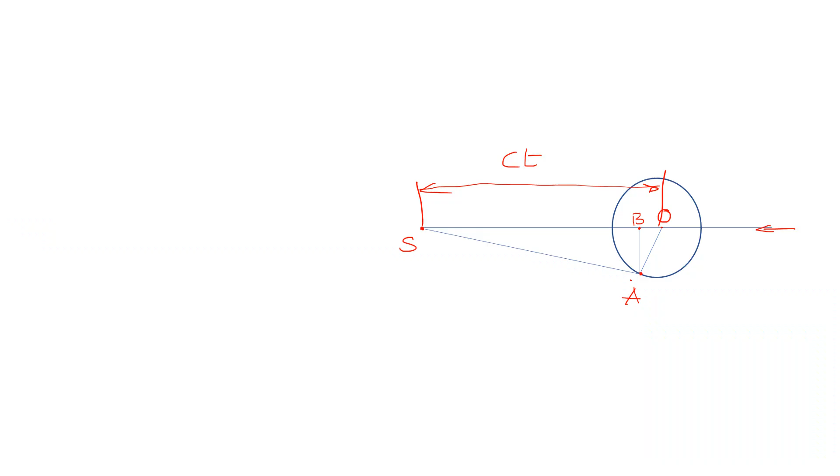In this video lecture, I will explain a problem on Mach cone. An aircraft is flying at an altitude of 3000 meters with 2000 km per hour. It passes directly over the head of the observer. Find the time taken by the observer to hear the supersonic boom after passing over the head of the observer.

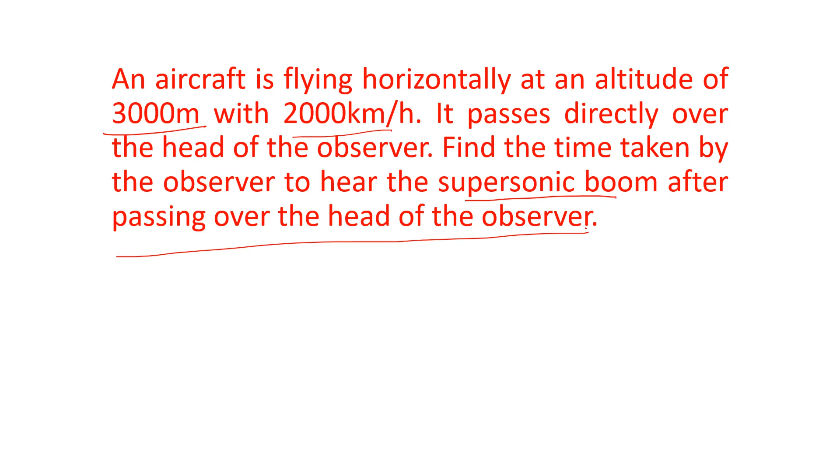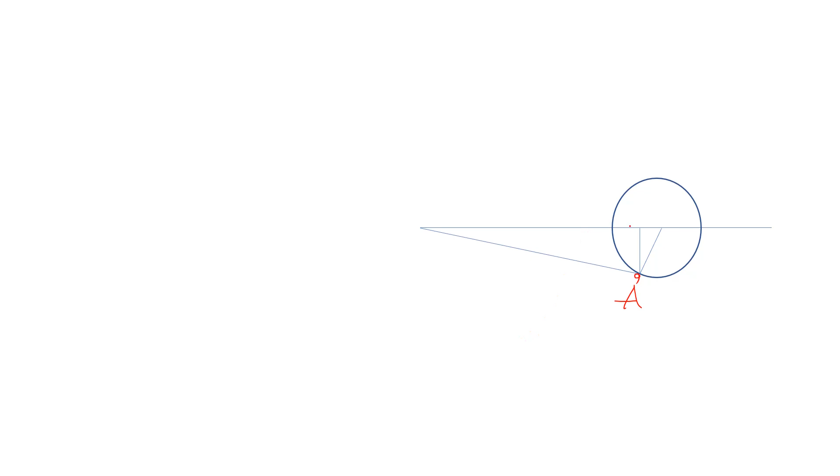Let A be the observer. B is a point directly over the head of the observer. This is the path of the flight. The flight is moving horizontally. Let the current position of the flight be S.

Our question is, after what time can the observer feel the sound wave after passing the point B? B is a point which is directly over the head of the observer. After crossing the point B, how much time will it take to hear the supersonic boom? That is the question.

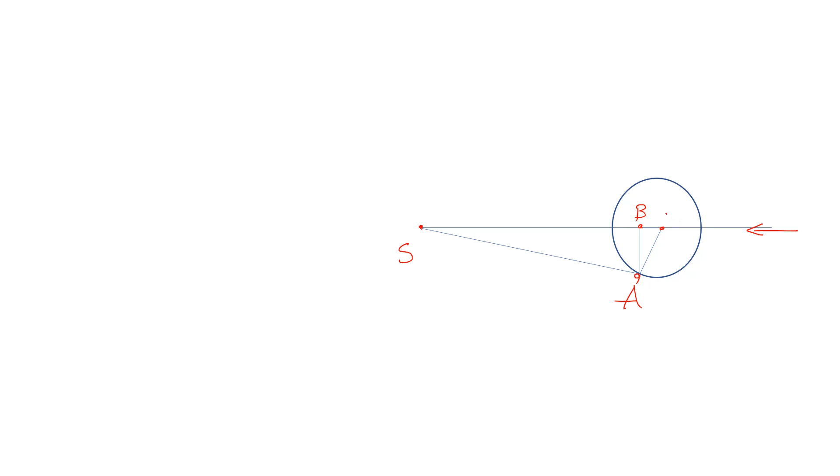The flight is moving horizontally. At time t equal to 0, let O be the position of the flight. With t seconds, the flight travels a distance of c into t, where c is the flight velocity.

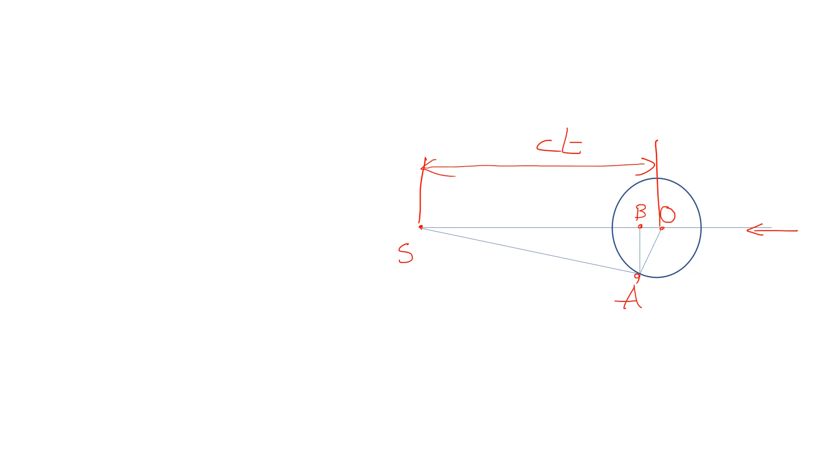The observer at point A can feel the sound wave produced by the flight when it was at point O. In other words, the sound wave produced by the flight when it was at point O will reach the observer in time t seconds. That is, AO equal to a into t. With time t seconds, the distance traveled by the flight equals c into t.

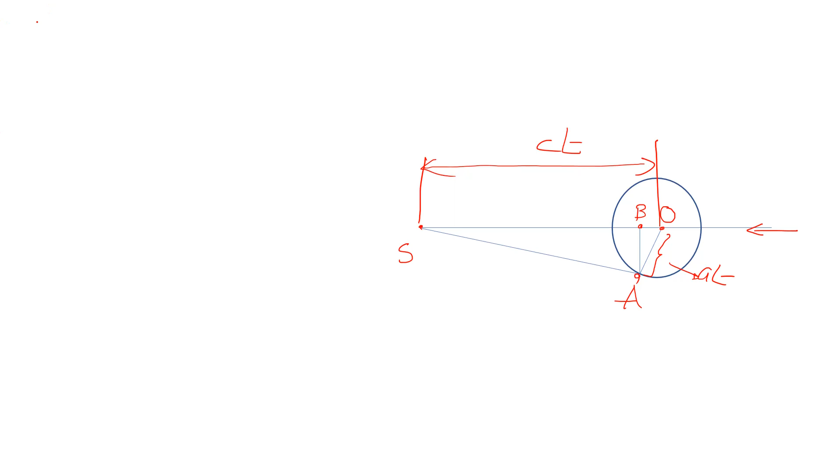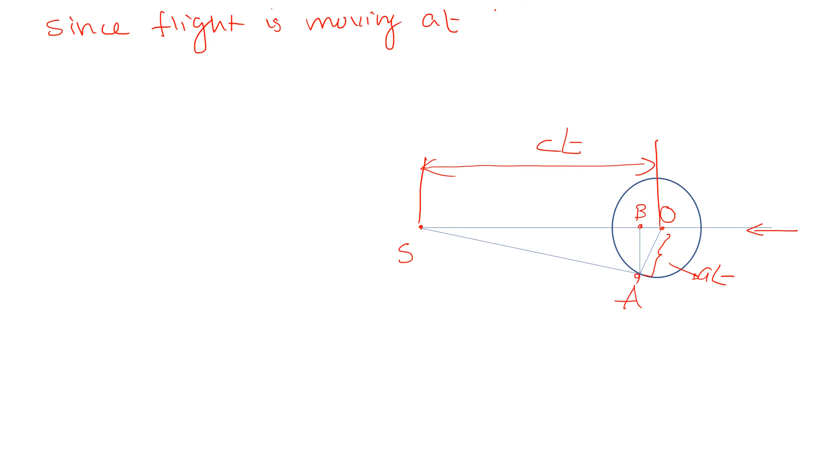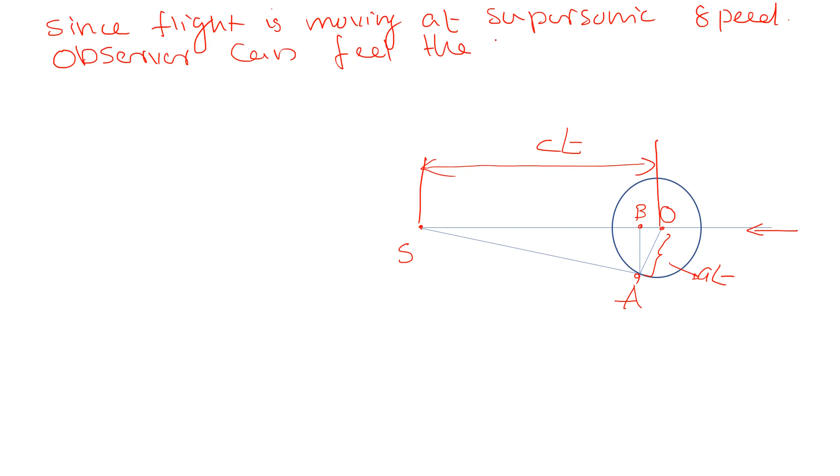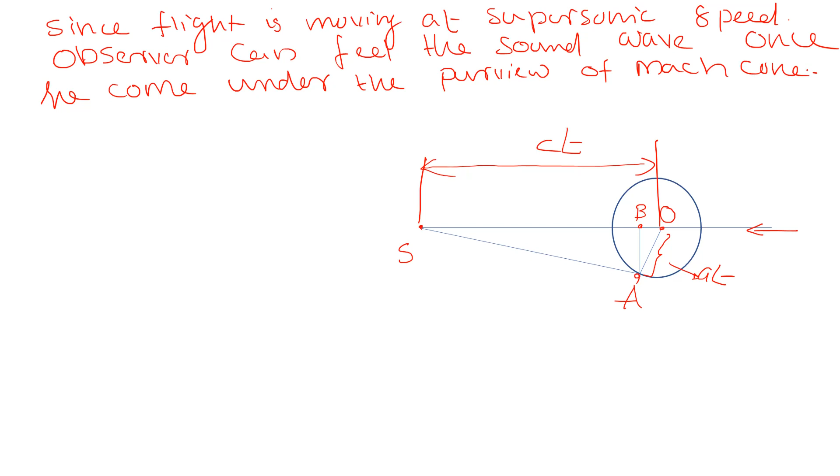In other words, since the flight is moving at supersonic speed, the observer can feel the sound wave once he comes under the purview of the Mach cone. Here the Mach cone is clear: SAO. The Mach angle is this angle, alpha.

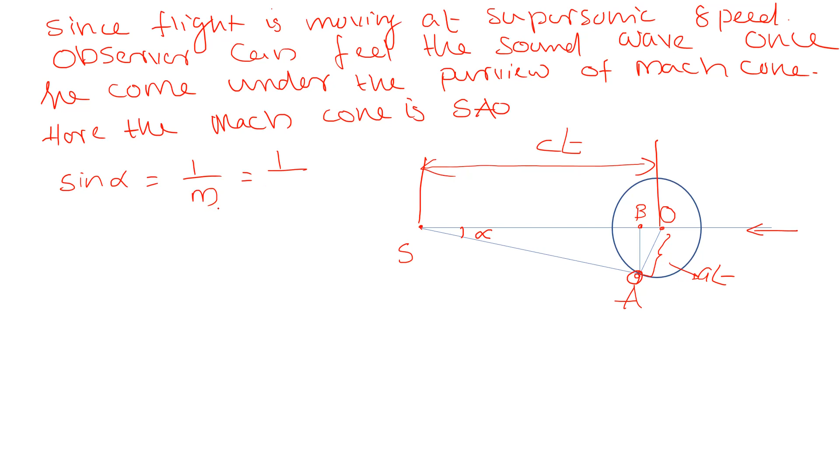So A can experience the sound wave once he comes under the purview of the Mach cone. Here the Mach angle is alpha, and the triangle or cone is SAO. Now sine alpha equal to 1 by m, which is equal to 1 divided by Mach number m equal to c by a, which is equal to a by c.

It is given that the altitude is 3000 meters, that is AB equal to 3000 meters. From the data book, corresponding to the altitude 3000 meters, the sound velocity A equal to 328.7 meter per second, taking gamma equal to 1.4.

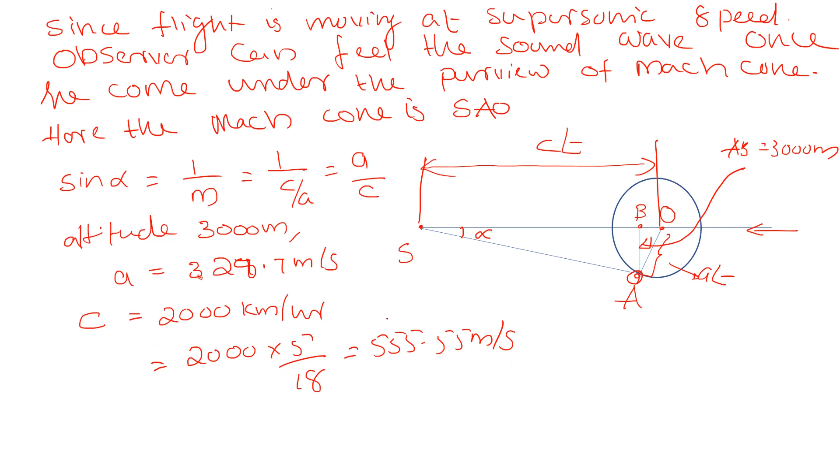c is the flight velocity, given as 2000 kilometer per hour, that is 2000 into 5 by 18, which equals 555.5 meter per second. So you can calculate alpha. Mach angle alpha works out to be 36.27 degree.

Now take the triangle SAB. In triangle SAB, alpha and AB are known, so you can calculate BS. BS can be calculated as 4088 meters.

What is BS? It is the distance traveled by the flight from point B to S. Point B is directly over the head of the observer. So BS represents the distance traveled by the flight after the point B.

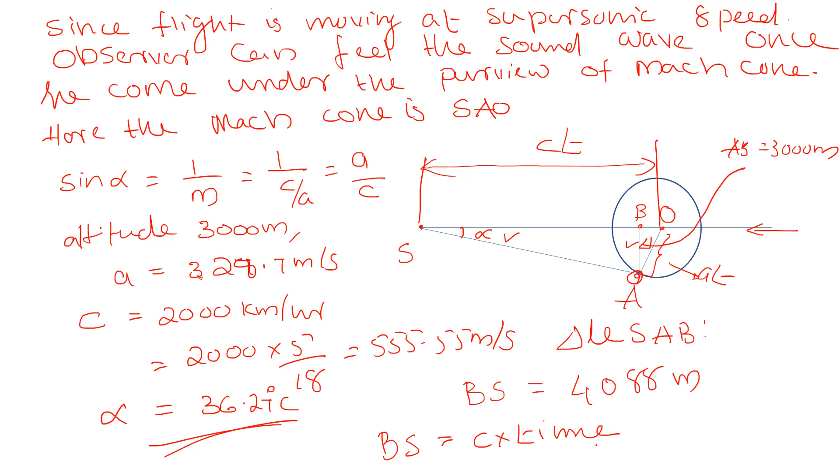BS equal to the flight velocity C into time taken. Flight velocity C into time taken equal to 4088.

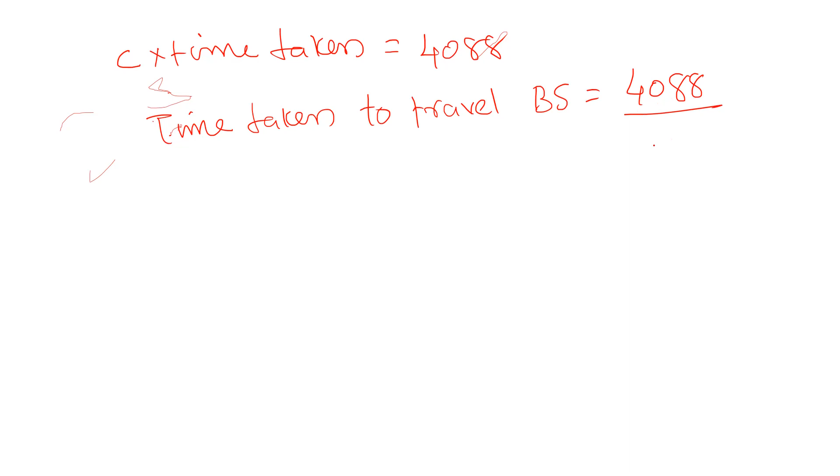Here we know the value of C. So time taken to travel BS equal to 4088 divided by C, where C equal to 555.55, which works out to be 7.35 seconds.

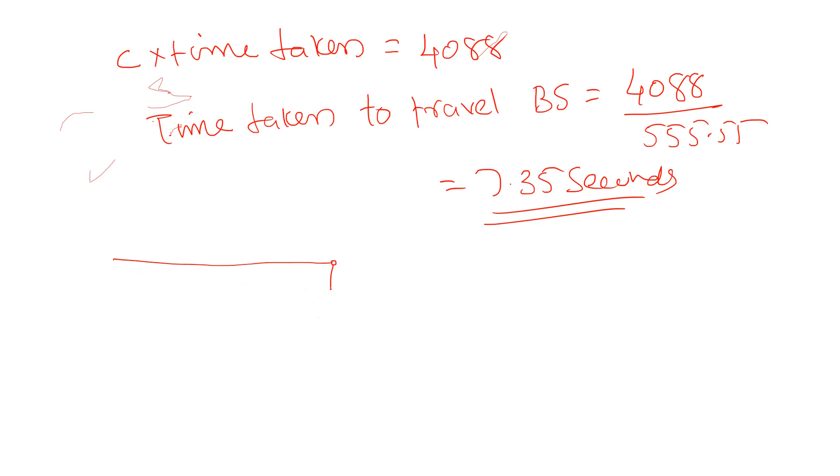That is, the observer standing just below point B can feel the sound wave after 7.35 seconds.